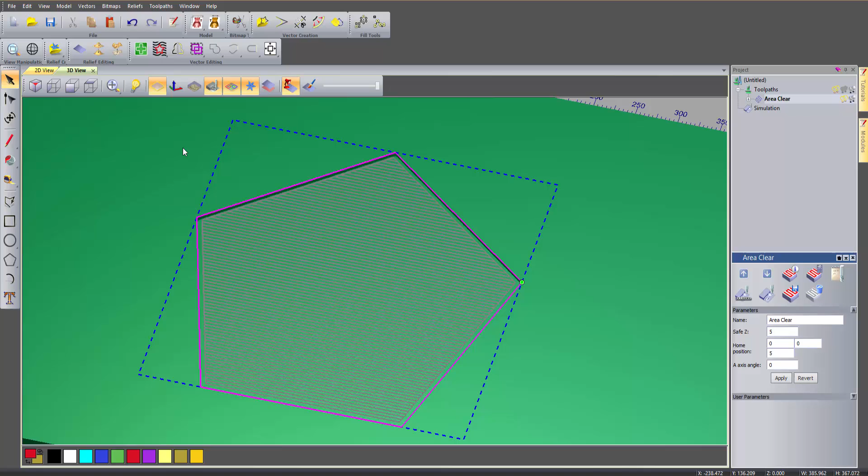Now that looks fine as it is. If I simulate this, you can see that it works okay, it doesn't look too bad. But the problem that I have, if I turn on the vectors, just turn off the toolpaths, is if I zoom in, you can see that it's left this little radius on the corner. Now that's just caused by the tool. It can't actually physically create a sharp corner because of the radius of the tool. Okay, so you're always going to leave that radius in there.

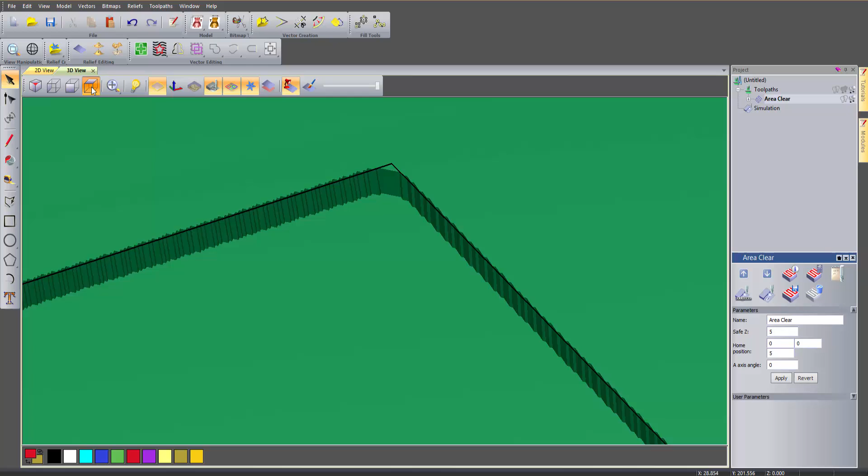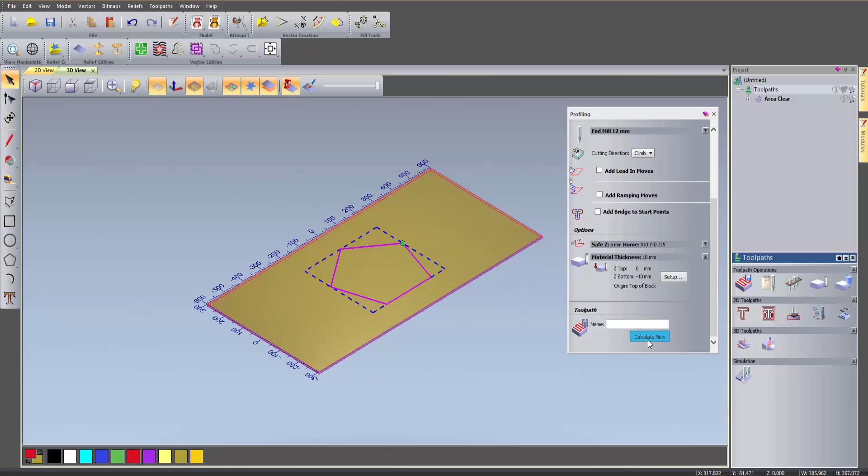Now the problem that I'm going to have here is if I take a plan view again, and this time I'm going to create not the pocket, I'm going to create the piece that fits into the pocket, and I'm going to do this using a profile. So I'm just going to cut the part out. Let's do this, let's say 10mm deep. I'll just use the same tool, just set up my material again, make sure that this is 10mm, calculate that,

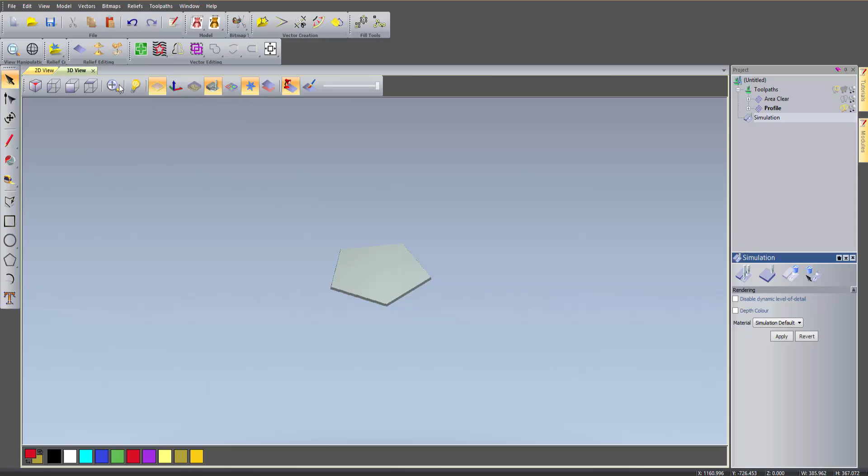and now if I simulate this to cut that out, I'm just going to go back to the default material just so you can see that it's two pieces of material, and let's just delete the waste material. Let's take a plan view of that. Now you can see that this has given me a perfectly sharp corner.

Now if I just open up my folder, I've taken a screenshot here of the pocket. You can see that because of this radius in the corner, this piece is not going to fit into this pocket. So I have two options. The first one is to put radius corners on each of the male, or I can use the inlay wizard.

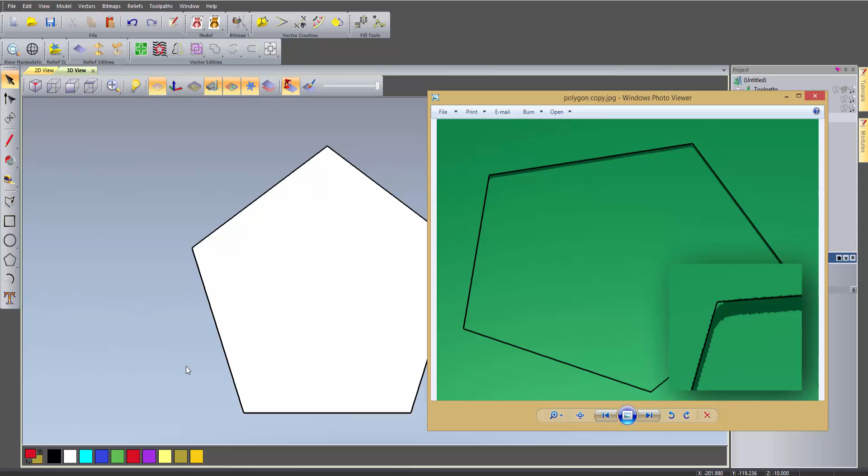Now you may not think that that's such a big deal to put radii on the corners here, but when you're doing something with lots and lots of corners, it can get quite confusing. And the good thing about using the inlay wizard within ArtCAM is that it will automatically work all of this out for you and create the radii on the corners for you. Okay, so let's get on with the demonstration.

So what I'm going to do is just close this model. I'm not going to save the changes, and I'm just going to show you what I'm actually going to be creating today. So here you can see quite a basic looking sign, but this is all letters that are inlaid within the base of the sign. And I'm going to show you how you can get all of these letters as one piece, and how you can create the inlay using this. As you can see, lots and lots of corners on this, so if you were to use the manual method to do this, it would probably take you quite a long time. So I'll just close that and minimize that.

Now if you take a look on the right hand side, you can see that I have no modules installed for ArtCAM Express. So everything that you're going to see is done just using the basic ArtCAM Express. Okay, so the first thing that I'm going to do is select new model, and that's going to ask me to set the size for my new model, and I'm going to do this 600 in height and 1.2 meters in width, and I'm going to do this in millimeters. I'll select OK, and this opens up a new model for me.

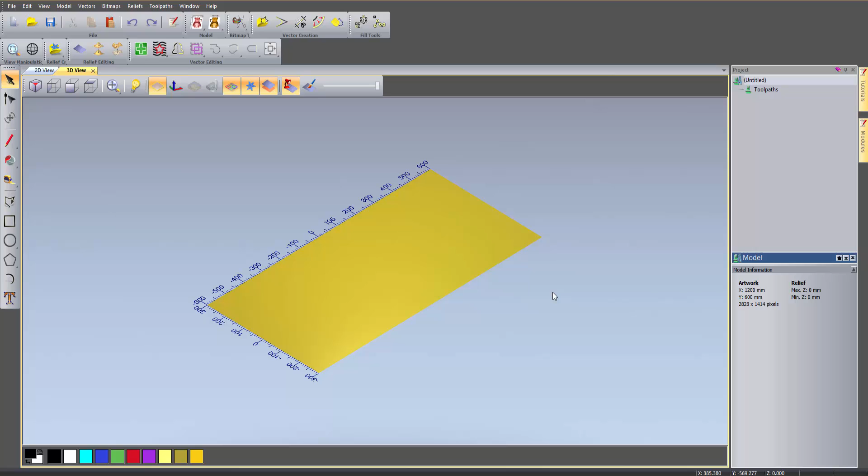If you just select the view from the top here, you can use it in exactly the same way as the 2D view. Now you'll also notice that we have these rulers on the left and at the top. Now this is new to R2, gives you a representation of the size of the actual model or the piece or the part that you're drawing.

Now if you want to turn these off, you have two options. You can do that by turning off the toggle vector visibility, but the only trouble with that is that it also turns off your vectors that you may have drawn. Another way to do it, to turn it off permanently, is go to view and then you can select to show or hide the rulers.

Okay, so the first thing that I'm going to do is create an ellipse. I can do that using the ellipse tool here. Now I want this to be in the middle and I want to snap from the middle. Another new thing in R2 is that we have something called snap hints. So if you go down to snapping, you can see that we've got something called snap hints. Now what this actually does is if you hover close to somewhere where there's a snap point, it will actually create a circle there. So it basically shows you where the nearest snap point is.

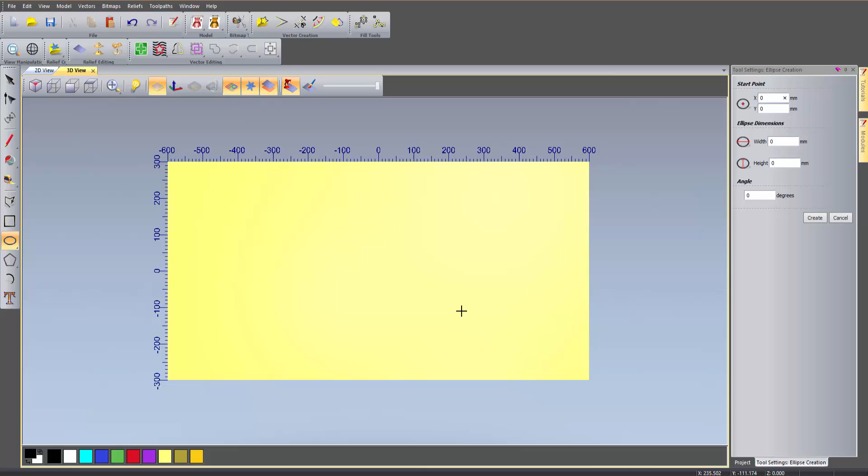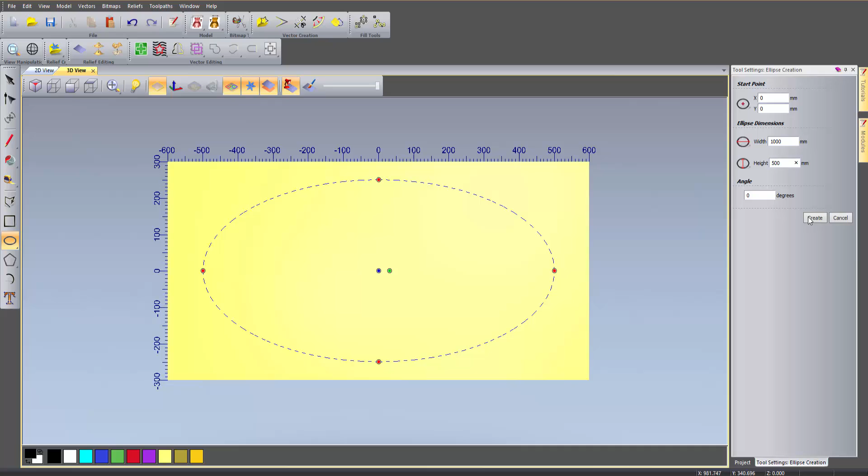Now I find this really useful to find the center of the model. Before the snap hints, I would be trying to find the center, and it would take a little while to actually find the center. Now I can just hover somewhere near and it gives me a hint of where it's going to be. So I can just select there and I've got the center of the model. Okay, so let's change the width of that. Let's say 1000, height of 500, and then I can select create, and I've got my ellipse.

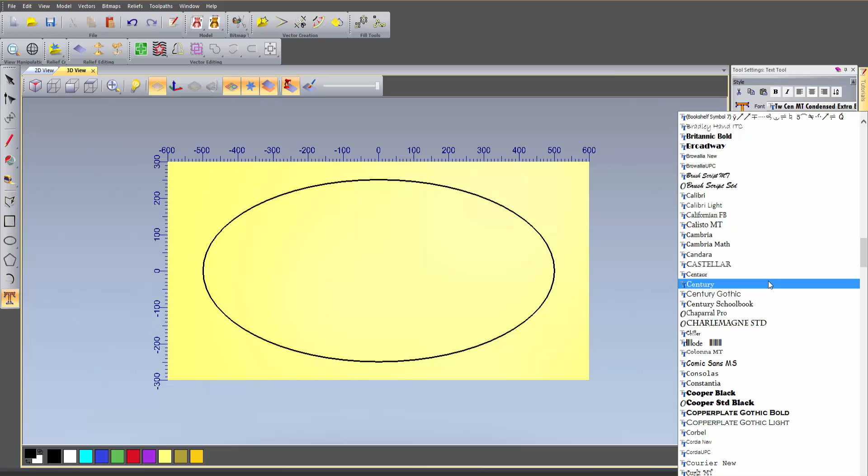Okay, so I'm now going to create some text. So if I go to the text tool here, this will open up the text tool on the right hand side. If I select where the font is, it will open up a drop down, and this basically will show me all of the fonts available to me, and these are all of the fonts that are installed in my Windows folder. So any fonts that I have installed in Windows will show up in ArtCAM, be it TrueType fonts or single line fonts. So I'm just going to use the font that I've selected here.

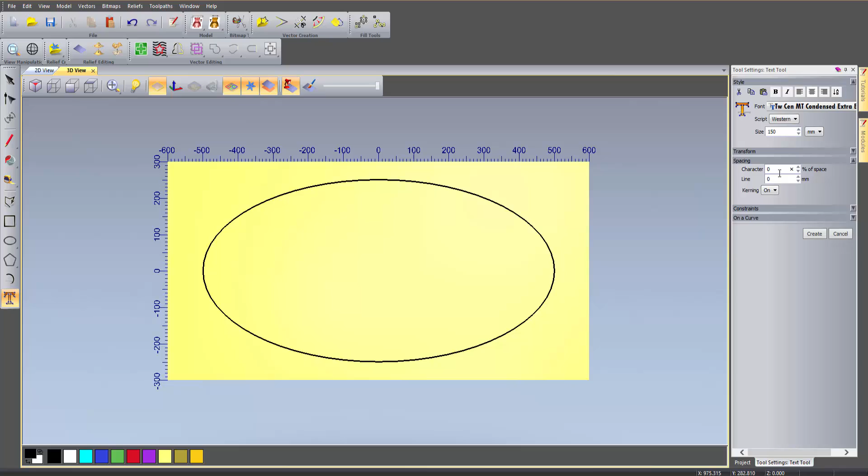I'm not even going to try to pronounce that, and let's give it a size, let's say 150. I know that that's going to work okay. Just set the character spacing back to 0. Let's just select on the model. Okay, so I'm going to type in some text. Let's call this Larry Lizards, like so. Now you can see that that's off center. I just need to select to center in the model, and it will center it.

I can select all of the text like so, just left clicking and dragging. Now you can see that each character is its separate entity, and I don't really want this for the sake of doing the inlay, because I would have lots of different pockets and lots of different pieces that I would need to fit in. Now sometimes you may want that, but for the purpose of this demonstration I don't really want that. So what I'm going to do is bring it all in.

Okay, so they overlap. So what I'm going to do is change the character percentage, and you can see that it starts coming down. Okay, so I want these to all overlap. I think it's going to be probably about -50 where this will basically be okay. Okay, so let's say -50. And when I'm happy with that, I can select create. And I'm just going to center that again, and then if I press Alt on the keyboard and then just move that upwards, it will maintain a 90-degree angle snap.

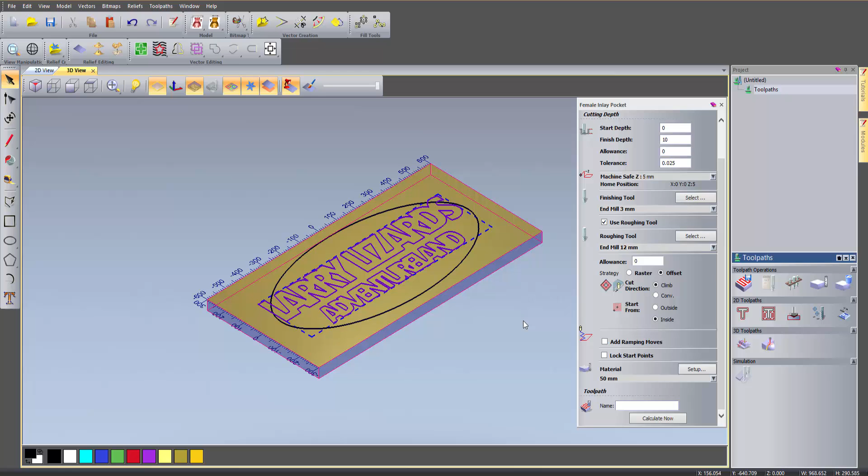And I'm going to choose the largest one that I have just to blast away the material. And I'm going to set up my material. Now this is going to be quite large, let's say 50mm or 2 inches. Select OK. Now let's just take a plan view of that.

Now when I create the toolpath, I know that I'm going to have a problem. Okay, it's going to tell me that the tool's too large to actually get in somewhere. So if I select calculate now, you can see that it's giving me an error message, and it won't actually calculate the toolpath because it's saying that the tool that I'm using is too large to machine either the male or the female. So when you actually calculate this, even though I'm doing the female pocket, it will automatically calculate whether you can do the male insert.

Okay, so that's quite useful because I know that I can actually machine the female pocket because I know where the problem is. So if I select OK and then just close that, just zoom in on this S. Now I can see that this is where the problem is, and the problem is caused by this gap here. Now what will happen is if I wanted to create the female pocket, I wouldn't have a problem because the tool would come round and then it would just leave a radius in the corner here.

But luckily enough, because ArtCAM automatically works out whether you can do the male insert, it's worked out that because it's left this radius in here, it's not large enough for the tool to get round this area here, and I'd have lots of material left here and it just wouldn't fit. Okay, so it saved me a lot of headache in the future.

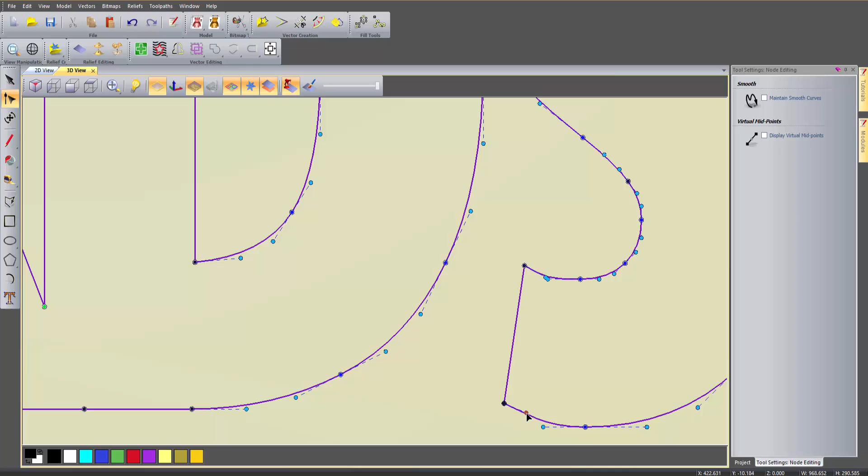Now there are 2 ways that I can get around this. First one would be to bring this into the D so then it's all one word and there isn't a gap here, or I can just make it shorter and change the design. So that's what I'm going to do. I'm going to grab this node and I'm going to bring that down here, bring that node down there. Let's just rotate this around like so. Let's say there. Let's rotate this around. Let's say about there, like so. So that looks okay. So if I zoom out, you can see that I've just modified this S here.

So let's select that again, open up the toolpaths, and I'm just going to edit this toolpath. Just select my tools again, and then calculate now, and this should work. Okay, so that's worked. So if I just zoom in, let's zoom in on this R here.

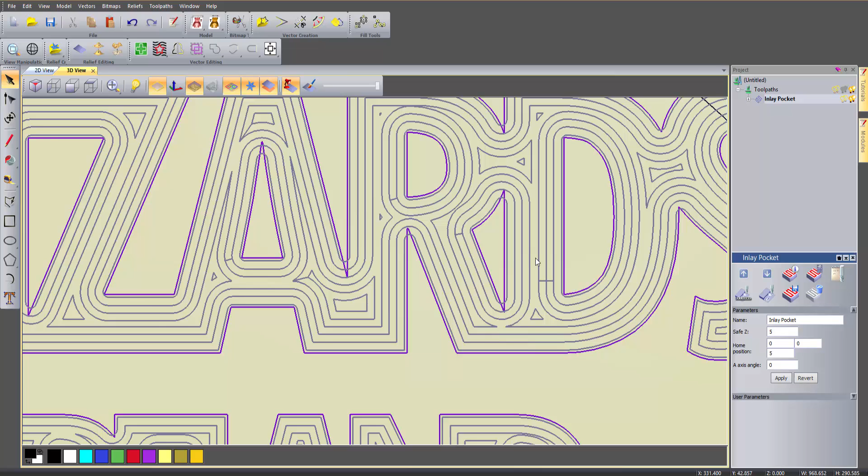Now what's happening here is that if I were to do a normal area clearance, the tool would follow this shape perfectly and it would create a sharp corner here. But the problem is when I went to do the male, it obviously wouldn't be able to get in here and it would create a radius. So that wouldn't fit when I came to actually fit the parts together. So what ArtCAM's done, it's automatically put the radius on here on the pocket, so it's taken that out for me. Okay, so it's quite useful.

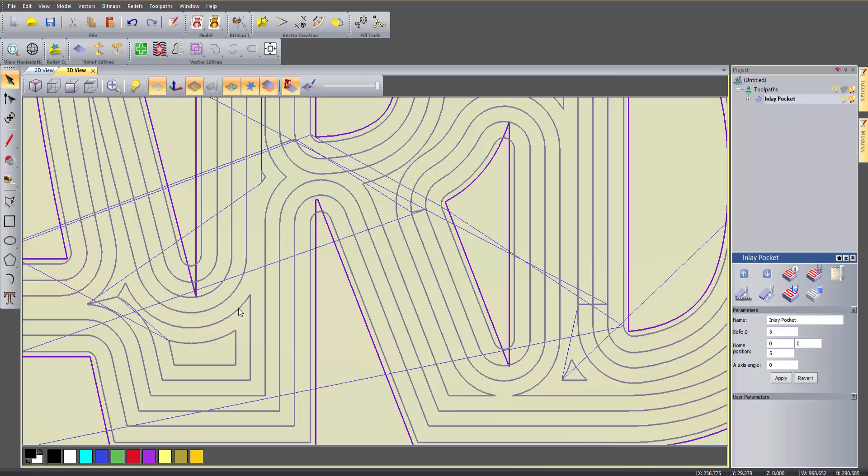Now if I were to do each one of these manually and put fillets on them, it would take me quite a long time to actually do that, so ArtCAM's automatically sorted this out for me. Okay, so let's zoom out. So I'm almost finished with the actual sign base now. So all that I need to do is select the ellipse, and I'm just going to cut the part out. I'm going to do that using a profile toolpath. So this is going to go to the depth, select a profiling tool, choose the 12mm and calculate now.

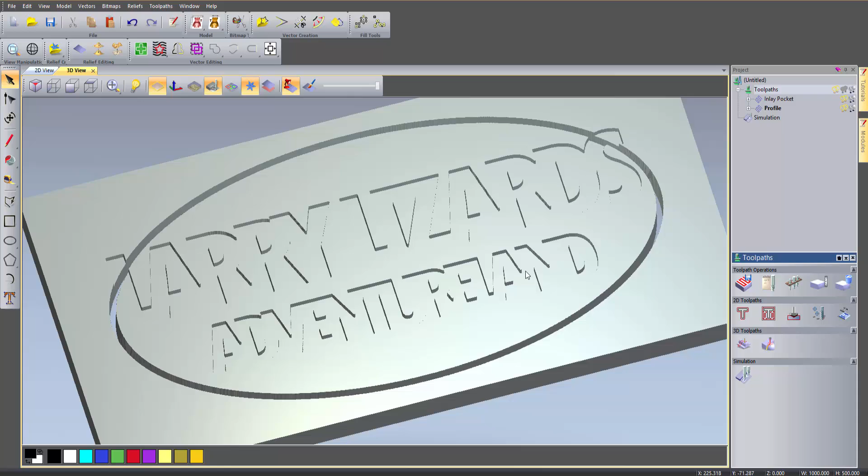So what I can do is right click and simulate all of the toolpaths. Okay, now if you wanted to, you could trim off the L and the S if you didn't want to come outside here. For the purpose of this demonstration, I'm not too bothered about that. This is all waste material. So let's just delete this waste material like so. And you can see that this is the sign base.

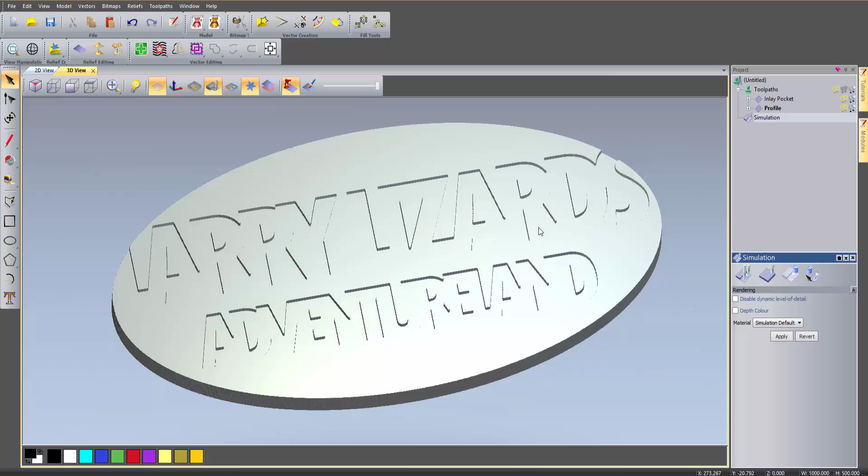Okay, so what I need to do now is create the male, so the insert that will fit into all of this pocket that I have here. And you can see that if I just zoom in, none of the corners are sharp. They all have radii on there. Okay, so if I just zoom out,

So let's create another inlay, and let's create a male insert. Okay, so the finished depth, I want this to be flush with the pocket, so let's do this 10mm. Now an important part of this is the allowance. Unless you wanted to offset the vectors to make them smaller, you can put an allowance in here, and this can be a minus figure. So I can put minus 0.1.

Okay, this is going to make the whole piece 0.1 smaller. That's quite important, because otherwise it would be size on size, and this piece would have no chance of fitting in that pocket. So this is going to make it 0.1mm smaller. So select a tool, use the same tool that you used to finish the pocket, so 3mm. Now obviously the thickness of this is not 50mm, so I need to set that up again. I'm going to change that to 10, and then select calculate now.

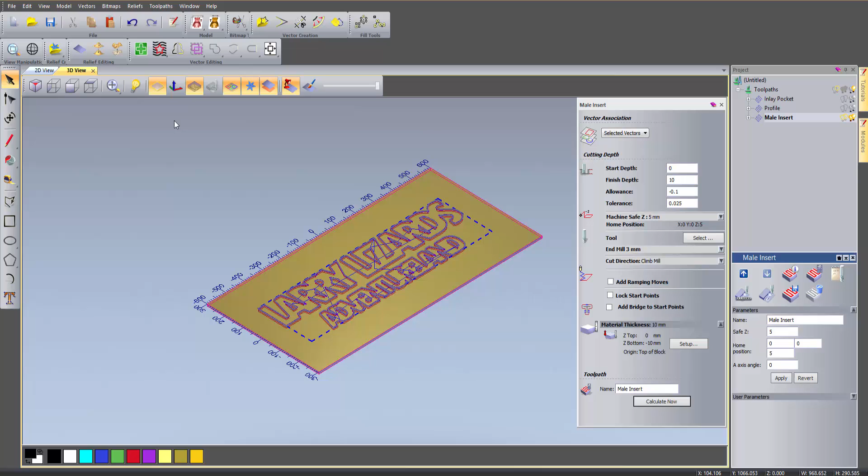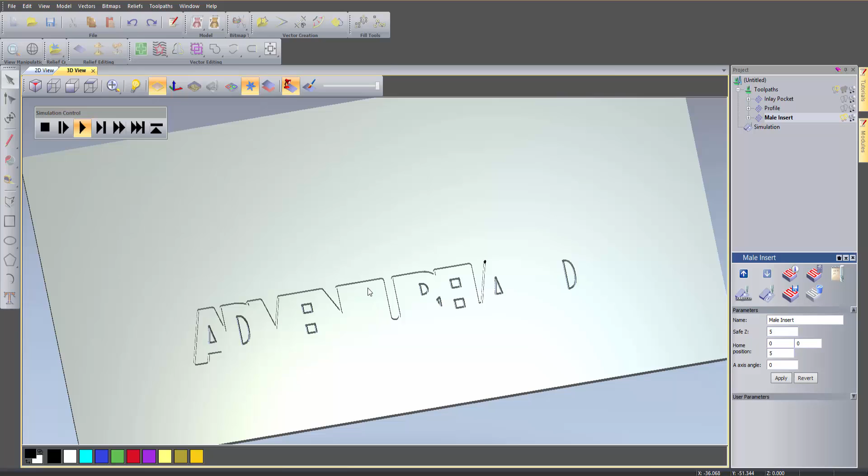Okay, so that's calculated the toolpath, and I can simulate this toolpath like so. Now if I wanted to, I could actually have the tool showing whilst I simulated. That's another new thing within R2. So if I delete that simulation, right click and choose simulation control bar instead, you get this sort of control bar here, and you also get the tool shown. And if I press play, it plays the simulation, and you can see where the tool's actually going. I can fast forward this by pressing here.

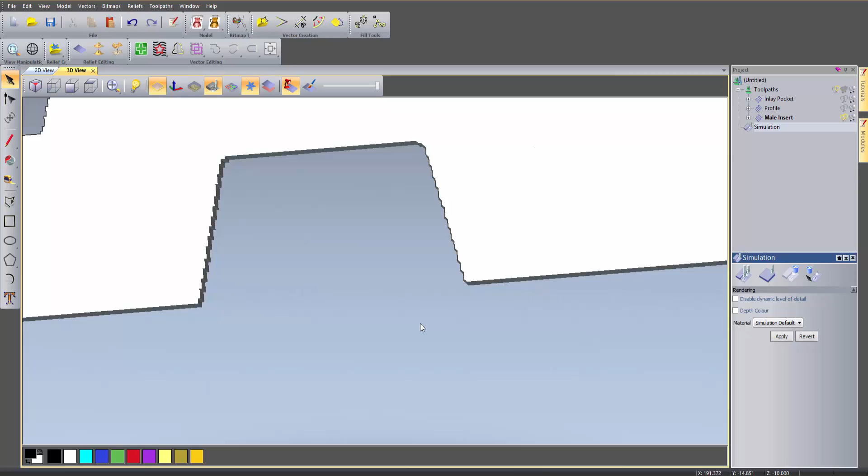Okay, so when I'm happy with that, let's delete the waste material, and you can see that that is my insert. Normally these corners would have sharp edges, but here you can see they all have radii on the corner, and they're all going to fit into the pocket fine. So this saves you a lot of headache in the long run.

Okay, so to actually send this to your machine, go to toolpaths, and then go to save toolpaths. The male insert, I'll just move that over onto the left for the time being, so that's in this section here. These are the toolpaths that I'm going to save. These are all for the pocket, for the base. You can save toolpaths to separate files, so each one goes to a separate file. It's useful if you've got a single headed machine. I can append the toolpath details to the file names, so I know what's what. I can choose where to save it. I'll just use the default folder that I've got here.

Now we have the machine file format. Now this is really important. It's basically a converter from ArtCAM that converts the toolpath data into a language that your CNC machine or laser will understand. It basically tells it where to go and how to machine it. In this list we have well over 200 post processors for all sorts of machines, and this is all available within the basic ArtCAM Express.